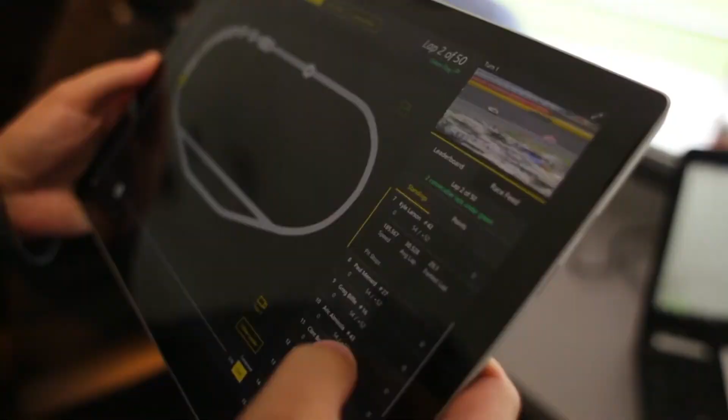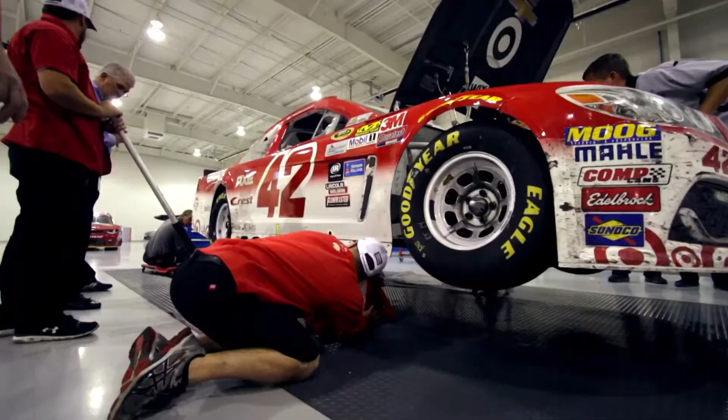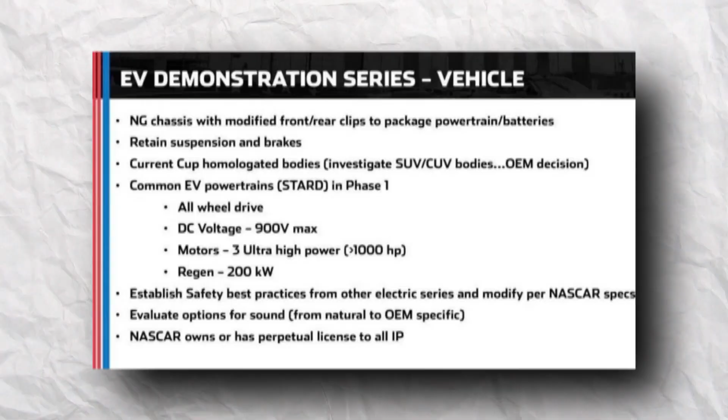Will NASCAR be fully electric from 2023? In recent years, a number of different motorsports series from around the world have been forced to make adjustments, not the least of which has been in response to concerns about the impact they have on the environment. There is no exemption for the National Association for Stock Car Auto Racing from this rule. It is by far the most popular form of auto racing in North America, governed by the most prestigious organization. All signs point to NASCAR's intention to make a significant push toward electric vehicles in the near future. Will NASCAR go electric, and when?

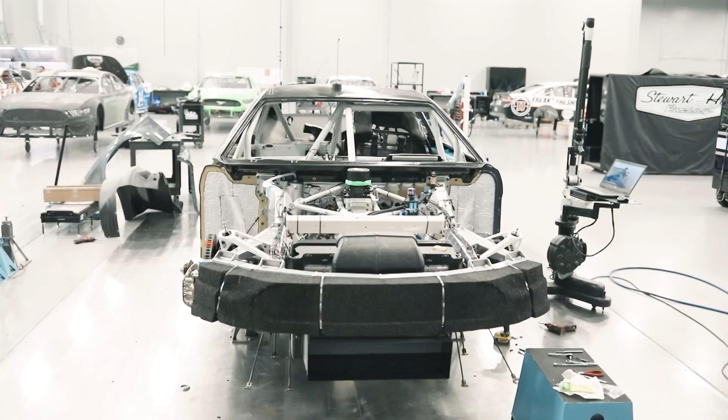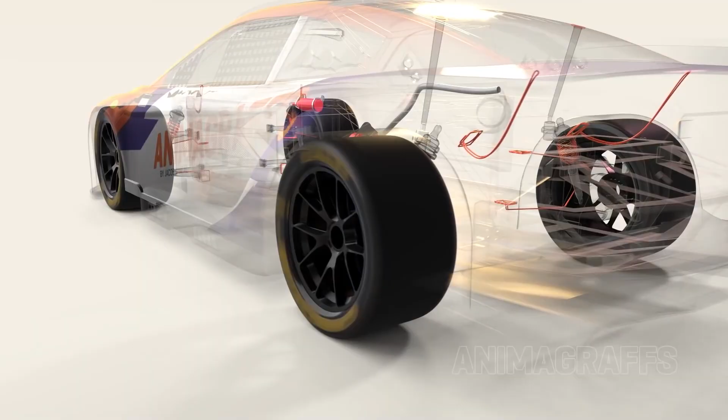It appears that the sanctioning body will begin incorporating electrification at the 2023 Busch Light Clash, scheduled to take place at the LA Coliseum in Los Angeles, California. The document that was leaked from NASCAR suggests that this will happen.

NASCAR's most recent generation of stock cars, known as Next Gen, were designed with electrification built in from the very beginning of the process of creating them. The current original equipment manufacturers, OEMs, are exerting pressure on NASCAR to more accurately reflect their own automotive product portfolios, which has led to the transition to electrification.

Well, you are familiar with the popular saying, 'Win on Sunday, sell on Monday,' right guys? The leaked documents suggest that NASCAR's electrified program will be implemented in phases rather than all at once.

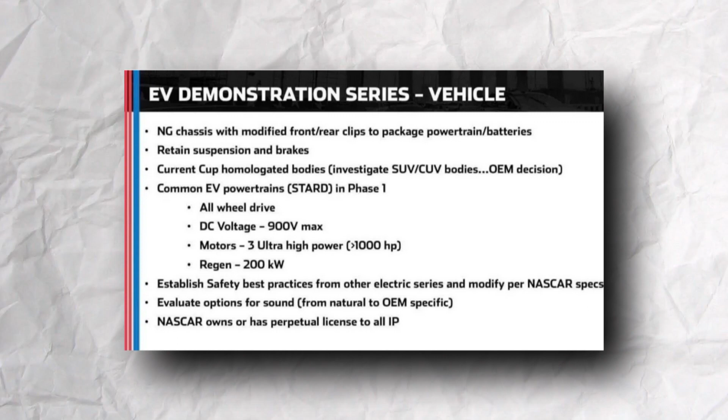The first phase, Phase 1, will consist of demonstrator events held alongside the regular Cup schedule at a total of 6 different events in 2023, with the Busch Light Clash being the first of these. The competitions would consist of two 30-minute races, one on Saturday and the other on Sunday, held to demonstrate the new cars to the general public.

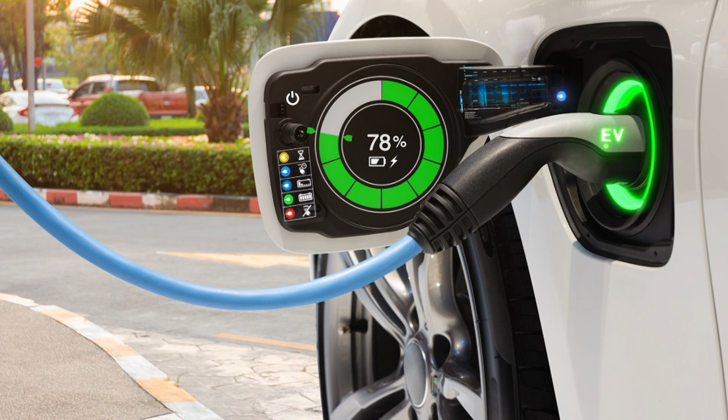It is possible that each manufacturer will be permitted to run up to 3 or 4 cars, resulting in a total of approximately 12 electric vehicles on the track. The events will not permit charging or battery swaps, but they will permit teams to participate in non-competitive pit stops for tire changes and repairs if necessary.

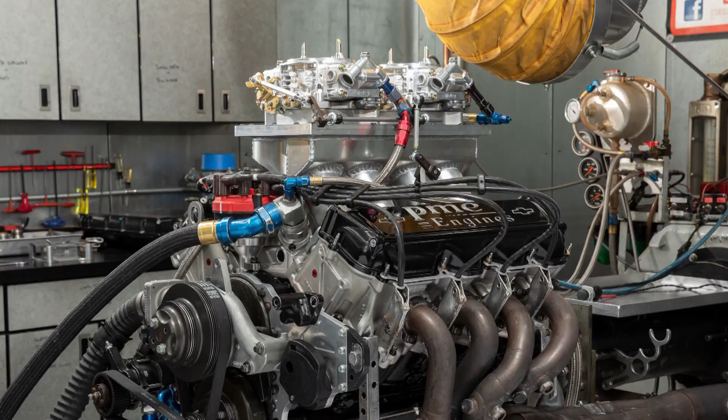The documents also revealed some information regarding the car's technical specifications. In order to accommodate the electric powertrains: all-wheel drive (AWD), a direct current voltage of 900 volts, 3 electric motors with a combined output of more than 1,000 horsepower, and a regenerative capability of 250 kilowatts.

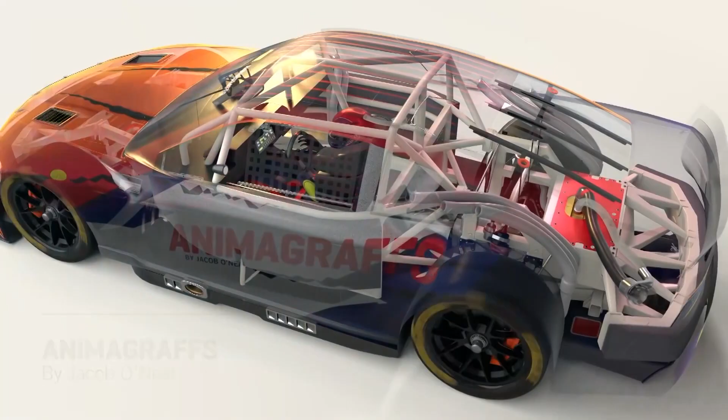The electrified versions of the next-gen chassis would have revised front and rear fascias. NASCAR has stated that it has established a goal for the cars to achieve lap times comparable to those of their counterparts powered by an internal combustion engine (ICE).

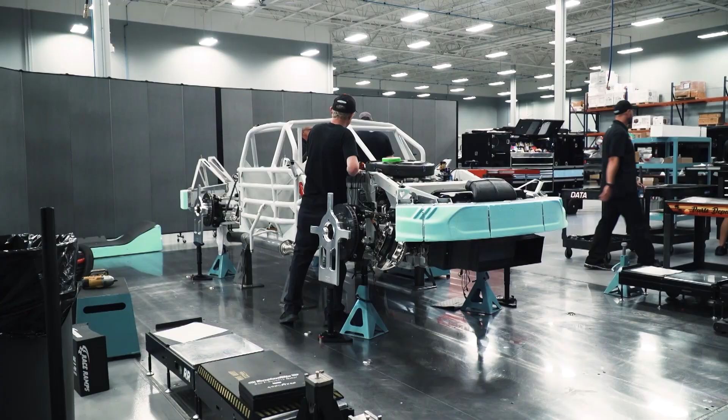Did you know that they were ready with these developments regarding electric cars for NASCAR? Let us know in the comments.

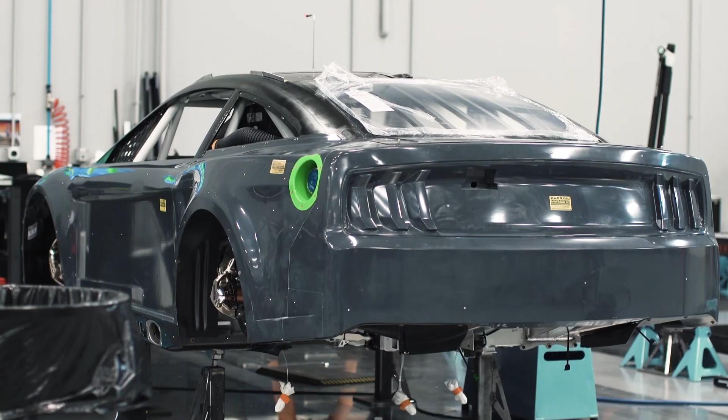Since electric cars don't make any noise, NASCAR will evaluate options for sound and look to OEMs for input in order to accommodate die-hard race fans who would enjoy listening to the sounds of stock cars racing.

However, what do you think might be the most intriguing aspect of the leaked documents? Let us know in the comments.

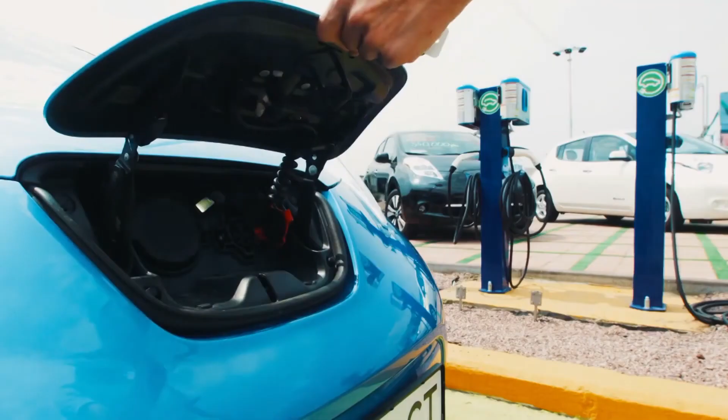To begin, it seemed as though there were 3 different illustrations of potential rebody designs for future race cars in the form of crossover or SUV vehicles.

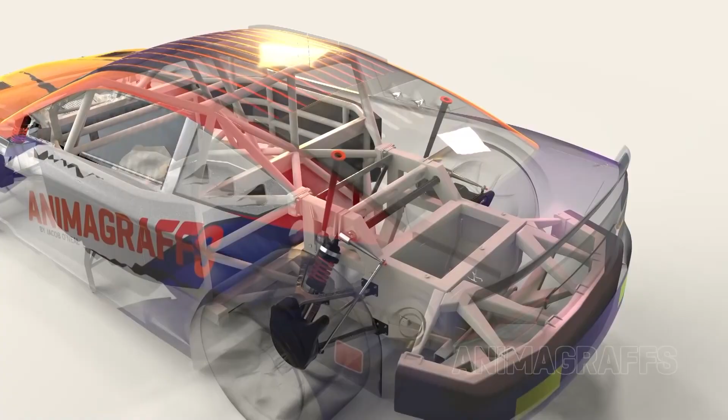The original equipment manufacturers (OEMs) will be given the opportunity to decide whether or not the NASCAR Cup program should transition from traditional race cars to a crossover or SUV body design in order to better align with their product lines. The illustrations that were leaked included concepts for the 2024 Chevrolet Blazer SS EV, the Ford Mustang Mach-E, and the Toyota BZ4X NASCAR Cup cars.

However, there is a catch here. Each of the illustrations features a battery electric vehicle (BEV) version of the existing OEM sports lineups. Last but not least, NASCAR would either own or license all intellectual property pertaining to newly developed electric cars. It is not entirely clear whether the electric racers will replace conventional vehicles in the Cup Series or compete in their own national racing series. However, NASCAR has plans to introduce electric cars into competition by 2025.

Which EV SUVs would NASCAR race? It's hard to say today what NASCAR would race if it goes electric. But who wouldn't like to see a Mustang Mach-E versus Chevy Blazer EV track battle? The Mach-E and Blazer EV are both amping up their performance rivalry, with the Mach-E coming in high-performance GT trim and Chevy adding an SS badge to the Blazer. Honda is also involved in American racing, and the 2024 Prologue could be an interesting racer. Could we see a Toyota BZ4X racer? Let me know in the comments.

The move by NASCAR could mean almost anything from hybrid race cars to fully electric vehicles, like those used in Formula E, or like those used in Formula One. There are a lot of people who are unaware that the modern Formula One car has both combustion motors and hybrid drives for its means of propulsion.

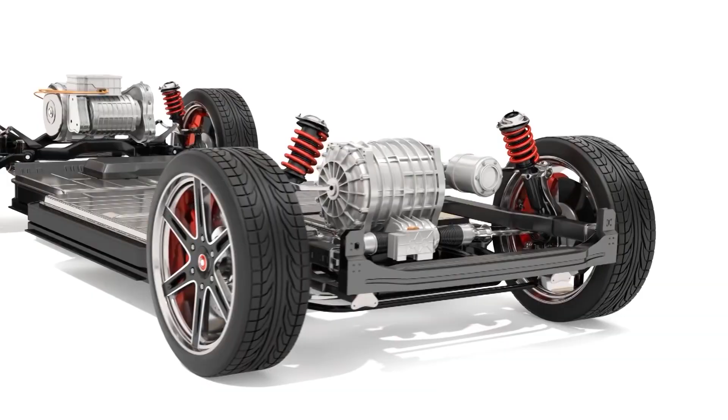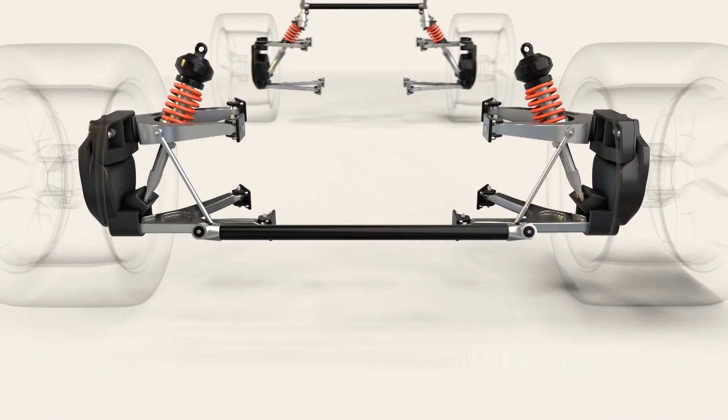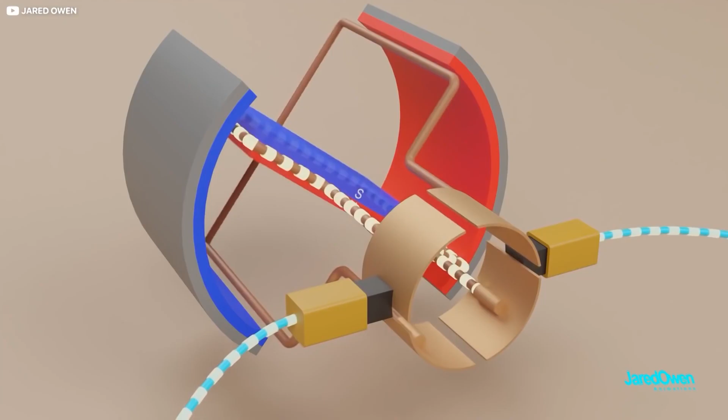How is NASCAR electric racing better than ICE Cup racing? In order to make electric vehicle racing interesting, NASCAR needs to meet a number of goals. It would be preferable if lap times could beat those of the current Generation 7 racing, but at the very least they would need to match them. It was only permissible to make pit stops for replacing tires, addressing mechanical issues, or repairing crash damage. Around each weekend's Cup race, there would be a total of two additional races, one on Saturday and the other on Sunday.

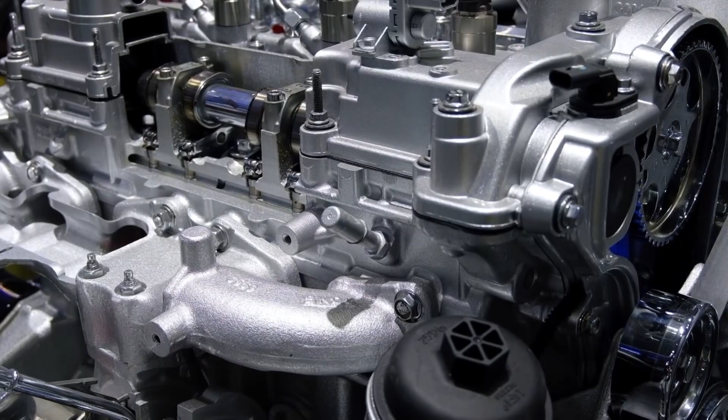It is said that the clips for internal combustion engine (ICE) drivetrains can be replaced with clips for batteries and electric motors in Generation 7 vehicles. Because the rest of the vehicle is capable of accommodating the change, the cabins, suspensions, and brakes should not undergo any modifications. According to the specifications, there should be three electric motors driving all four wheels. Just imagine how much more traction you would have over the standard rear-wheel drive race cars. To meet NASCAR's standards, the engines will need to produce 1,000 horsepower each. A 900-volt battery adds 200 kilowatts from regenerative braking.

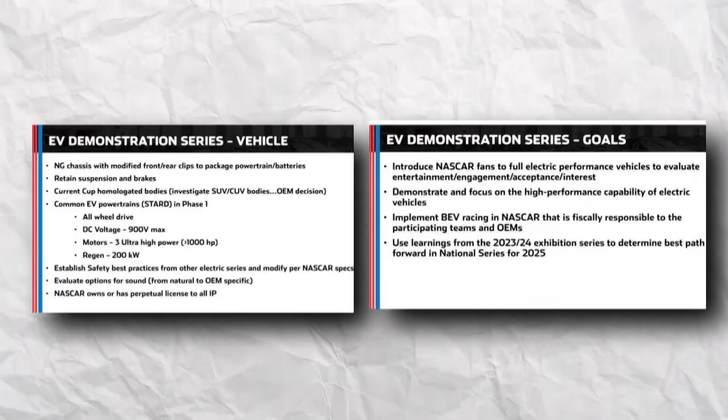There have been a lot of questions about NASCAR. Some are asking if Dodge will return to NASCAR. Well, Dodge has been rumored to be returning to NASCAR. It's possible that the Dodge electric muscle car we'll see in prototype form next month will be included in next year's demonstrations.

When Kickin' the Tires reached out to America's most popular racing series for comment, the response was, as previously stated: 'We are investigating the feasibility of an EV demonstration series. As the program progresses, we are collaborating with our OEM partners and race teams.' If everything went according to plan, stock car racing would experiment in 2023 and 2024 before launching an electric series in 2025. We won't be surprised if plans and dates change, given that we're dealing with leaked documents indicating that the first potential EV race is 8 months away. 'If we are going to get into an electric space, I promise you it will be entertaining, something that fits into our portfolio, and something our fans will be proud of,' said Series COO Steve O'Donnell. 'It will most likely take some time and tweaking to get it right, but it is on its way.'